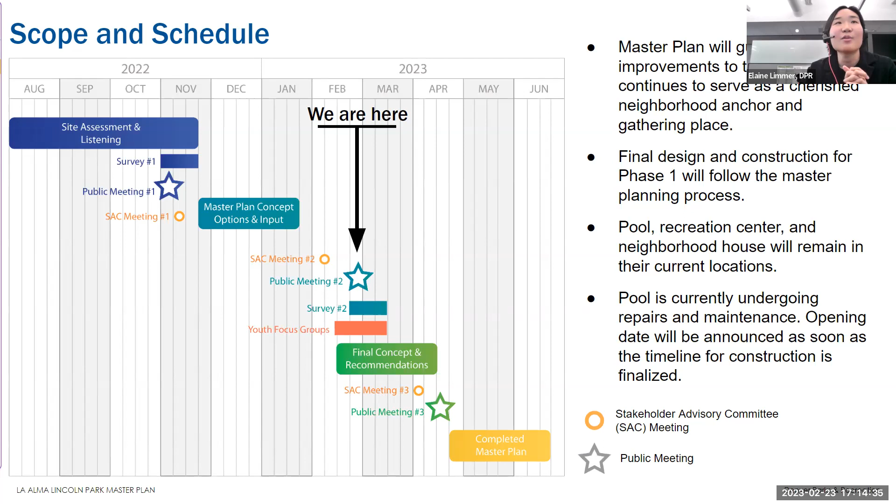Hello, everyone. It's great to be here tonight and have so many people virtually and in person. As Elaine mentioned, we're going to walk through some background for those of you who weren't able to attend the first open house. We'll go through a little background, then get into the concepts.

One thing we haven't mentioned is we are going to be doing some Zoom polling tonight. For those who are virtual, we're going to do some polls that'll pop up, trying to get feedback on the various concepts. For those of you at the rec center, we have people there to gather that feedback, plus a survey with similar questions. So we're capturing feedback in person at the rec center, but we'll do Zoom polling for those that are virtual.

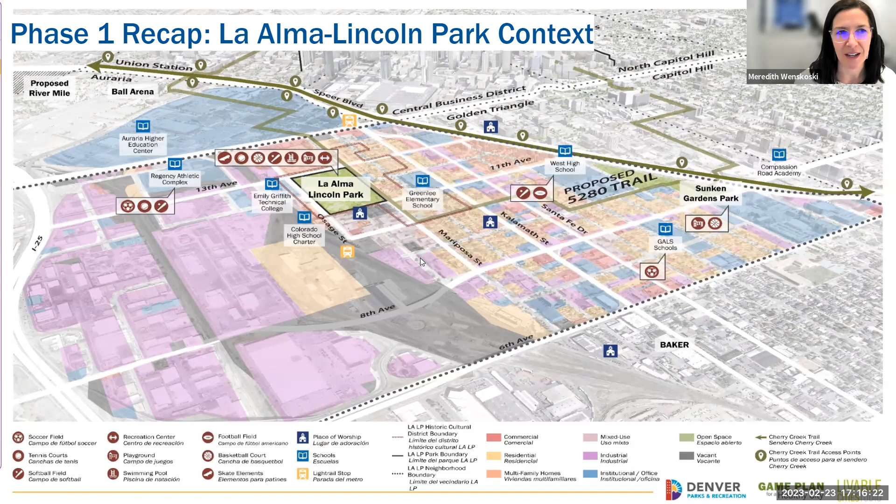As part of our initial work doing background and analysis, we did a lot of research to understand the historic context of the neighborhood. We've also had a stakeholder advisory committee that's provided some more detailed input on this, which has been really helpful.

If you want to go to the next slide, just to highlight a few of these elements - as we're moving through our concepts, we're really thinking about the history of the park and the neighborhood and how it's influencing and contributing to what we're doing today.

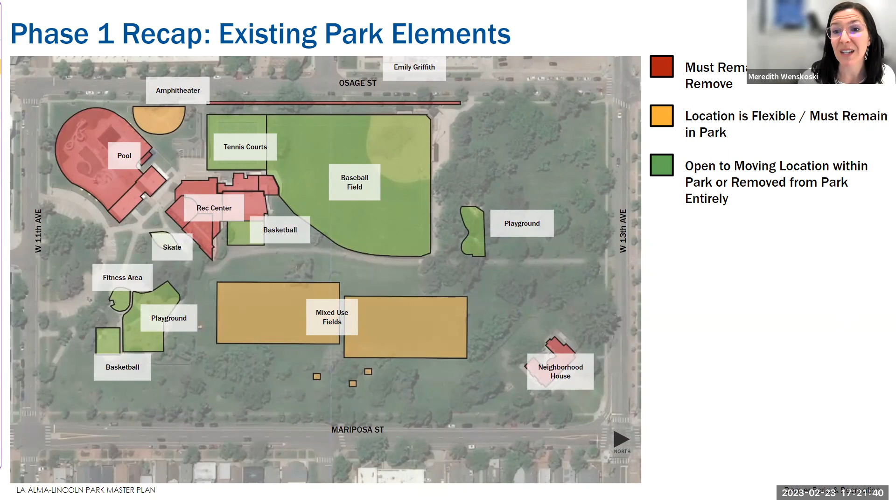Mixed use fields are also highly utilized and will be remaining. Then those green elements, other program elements like the tennis courts, baseball, playground, basketball, and fitness areas, are a bit more open, meaning we've explored different locations within the concepts, and some of the concepts have actually taken some of those programmatic elements out.

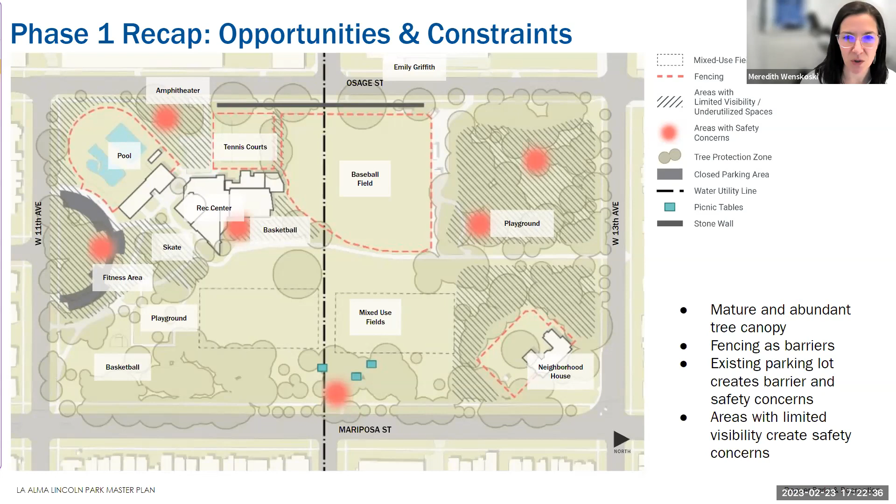So with that, Chelsea's going to go through the engagement from the last public meeting and the survey.

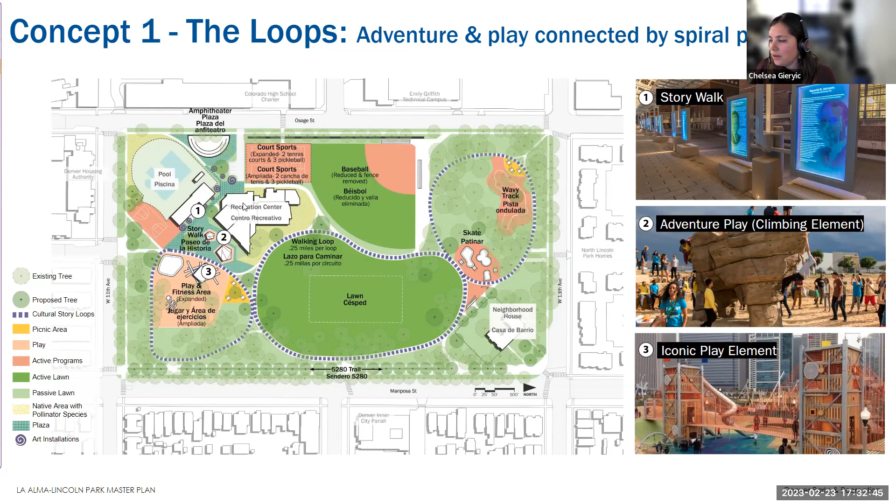The main loop in the park, the darkest purple line in the center here, this could operate as a walking loop, with each lap being about 0.25 miles. That's about the size of one loop around a standard track. It's a kind of fitness element.

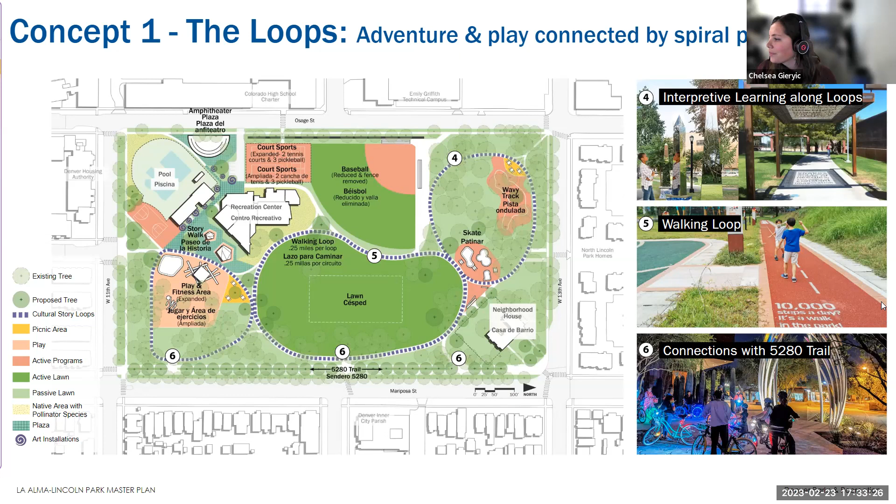And lastly, more active adventure elements will anchor the northwest area of the park, with very limited impacts to the beautiful tree canopy there in this corner of the park.

And then more fitness challenge stations will provide more fun ways for people of all ages to be active within the park.

We lastly wanted to highlight how this concept approaches a sense of arrival and circulation. Instead of the main path being a straight north to south linear experience, we've broken the park up into these loops. The main arrival moment remains along 11th and 13th, and an additional arrival is created along the 5280 trail off Mariposa here.

And parking is given less priority in this concept, but we are maintaining ADA spots here to give access to the back of the recreation center.

I'll let Meredith run through a couple polling questions.

Yeah, so we want to ask you all some questions. What we want to know is, what do you like most about this concept? I'm going to read through the options here to make sure we get the interpretation.

So the first is looping walking paths highlighting cultural stories through artwork and signage. The second is amphitheater staying in its current location. The third is story walk connecting entry plaza with amphitheater.

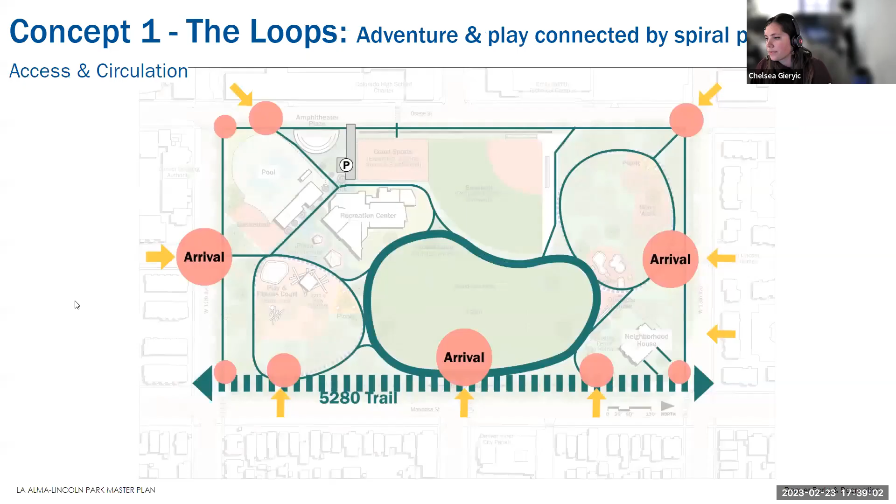So if there's anything else, feel free to put it in. And if you think about it later, you could even just say, I did not like this in concept one - I think the baseball field could go altogether. Well, you will see that in some other concepts.

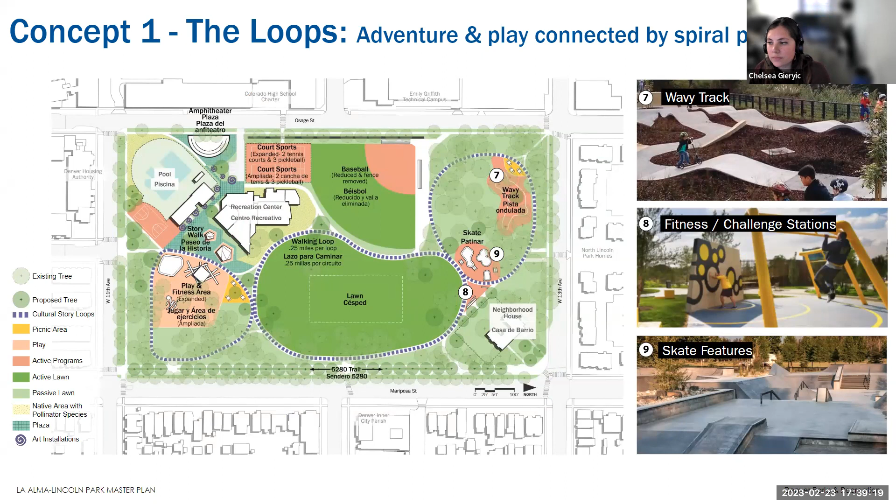So Chelsea, let's dive into concept 2. Sounds great, we will get going to the next concept, which we call the Ribbon.

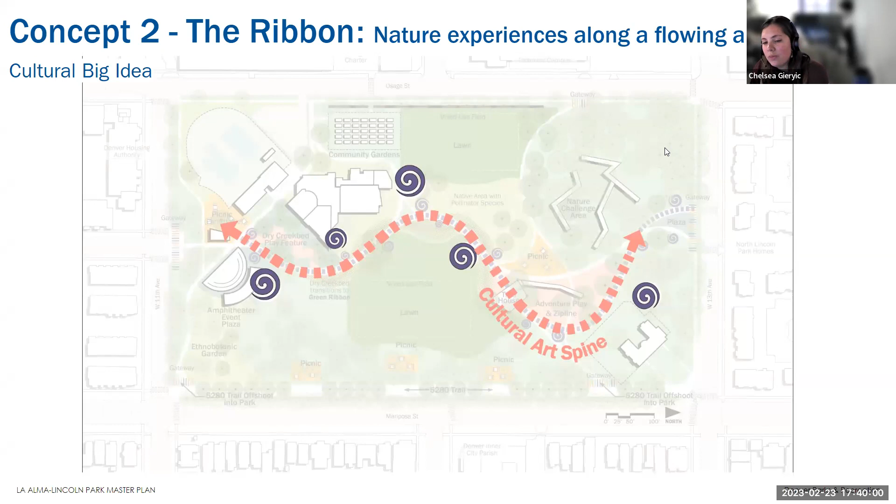The cultural big idea for this concept is that the major flowing art trail through the park would celebrate art installations that would be authentic to the neighborhood and the park's unique story.

Getting into this concept, you'll notice that some of the big elements have been moved or removed completely. The amphitheater relocates to the entry area along 11th here. We've been working closely with the historic preservation planners who've informed us that while it is a contributing historic feature and it would be a very costly, careful process, this might be a possibility. So you'll see some explorations of that.

And since this concept was all about natural experiences and inspiring a sense of resiliency, we did remove the baseball field in this option to make room for more swaths of native plantings and pollinator gardens. Community gardens replace the existing tennis courts in this concept.

An art walk into the park creates a vibrant, fun entry experience off 13th. And the plaza next to the recreation center would feature a dry creek bed, which creates nature play experiences for kids. And as I mentioned, the major cultural trail weaves in and out with this green ribbon as pictured in call-out number 3 on the right here.

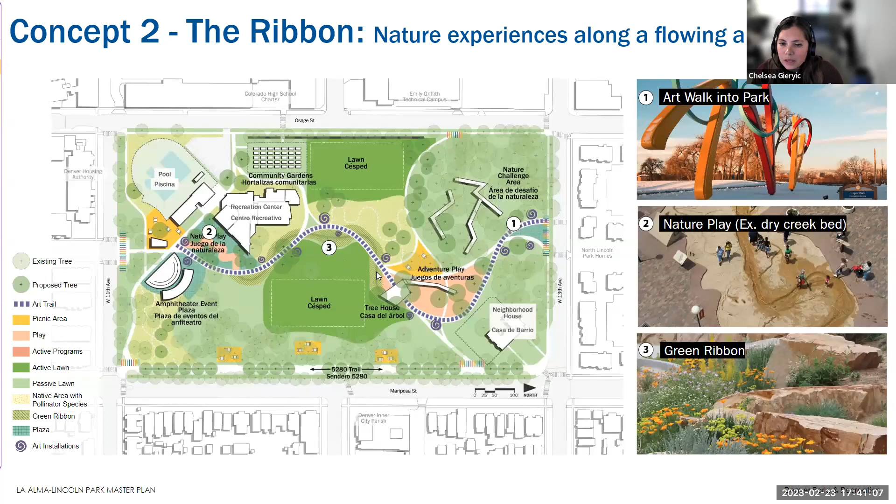So the art along the trail would be really vibrant and interactive.

You'll notice that the play elements in this concept have shifted to the north end of the park. This would be adventure play focused, featuring fun elements that we heard support for in our first phase of engagement, like a zip line.

And the play area would even have a treehouse element, pictured in call out number 4, which would allow both kids and adults to get up to a higher vantage point and enjoy some of the really beautiful views to the Front Range Mountains that the park provides today. And this adventure play programming could be a great adjacent use for the neighborhood house and their amazing existing youth programming.

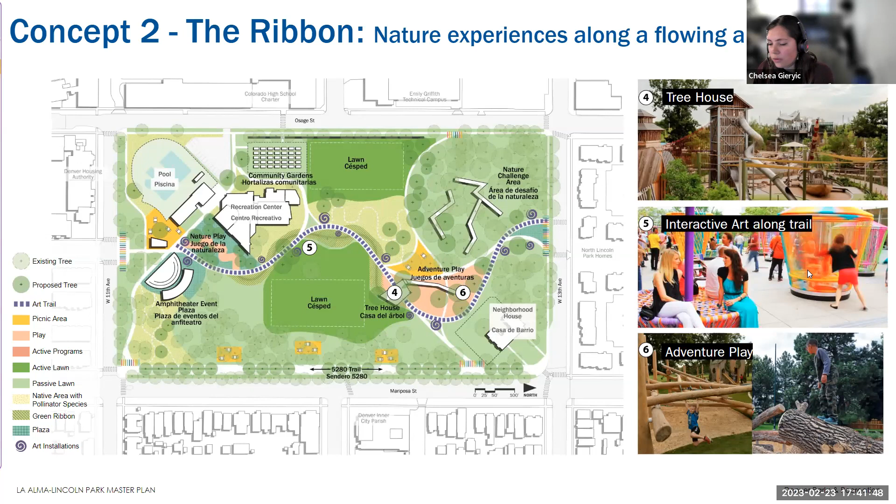This concept also works to maintain that tree canopy in this corner of the park and incorporates a nature challenge area, which could mean utilizing ropes or canopy walks to immerse people in those trees.

Artistic gateways would anchor the major points of entry for the park, creating an inviting and expressive entry experience. And at the corner of 11th and Mariposa, there's an ethnobotanic educational garden, which could be utilized as a learning opportunity to grow plants once grown by the local native people.

And lastly, we wanted to highlight again how this concept approaches arrival and circulation. We've created this flowing trail connecting the north and south areas of the park, and 5280 trail users will be encouraged to enter the park and walk, bike, or roll along that cultural art path as an offshoot to the main trail experience. And parking in this option is slightly expanded to support the community gardens and the recreation center.

Now, similarly, Meredith will run you through some questions here. Yeah, so let's see if the polling works this time.

Yes, so I will quickly share the results from the first one. Perfect, so people can see.

So it looks like the looping walking paths highlighting the cultural stories was the most popular, at 52%. Amphitheater staying in its current location, 39%. And then I'm seeing other comments coming through chat kind of supporting that. And then everything else is pretty darn similar. We got the story walk, baseball staying, expanded playground, and the north side of the park activated all between 26 to 32%. That's great. And I saw some others in chat, but that's great feedback.

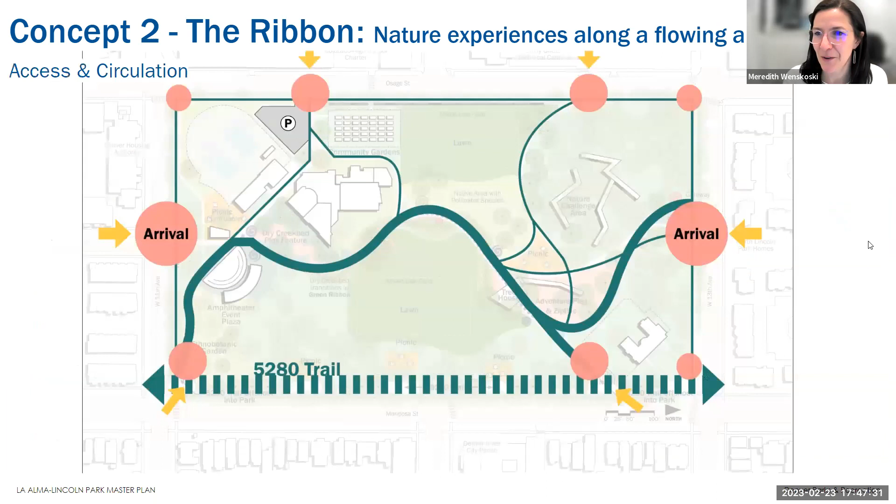So we will get into concept 3 here, which we call the Hub. This concept is all about providing spaces for people of all ages and backgrounds to gather, and really trying to provide something for everyone. The cultural big idea for this one is a central cultural core, which lands right in the middle of the park.

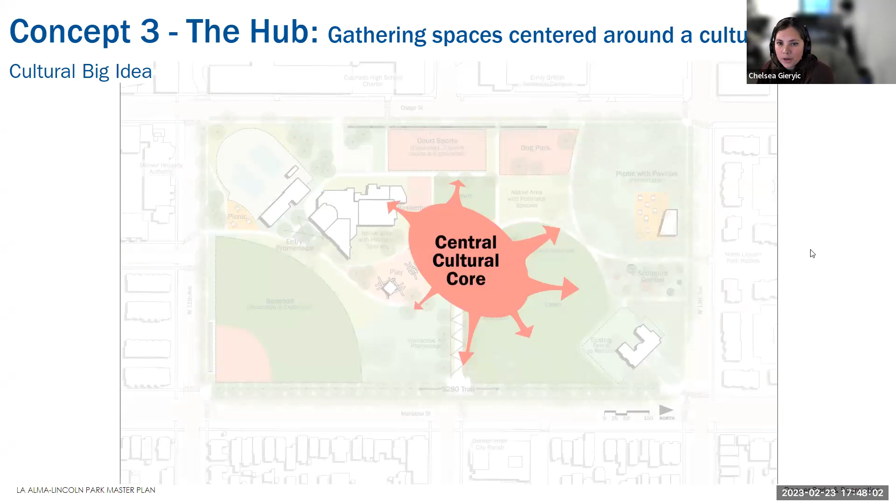Starting to get into the concept, you'll notice some of the big elements have again been relocated. The amphitheater moves to the central cultural core, and the baseball field moves to the corner of 11th and Mariposa, expanding slightly. This one would have a fence that remains around that. This opens up the central core of the park for more community uses.

The tennis courts remain here and include even more pickleball courts for this concept. The central core includes a larger event space supported by the amphitheater for concerts or markets. And there'd be this major promenade off the 5280 trail along Mariposa with interactive art elements.

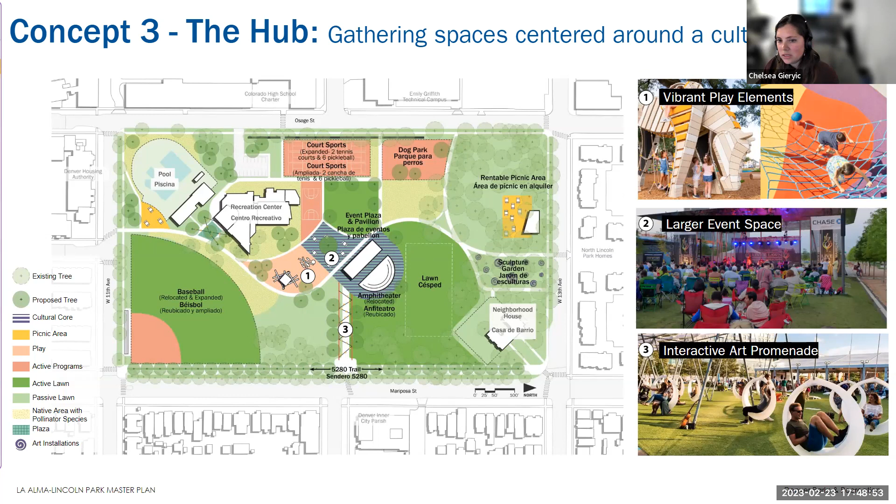The major play elements shift slightly to be right next to the event plaza and pavilion, and they would incorporate some vibrant play elements.

Another feature of this concept would be a small event space with some picnic tables to support the pool area. This concept does suggest a dog park, a smaller dog park, to activate the edge along Osage here. And then the entry to the rec center off Mariposa includes some trees with overhead lighting.

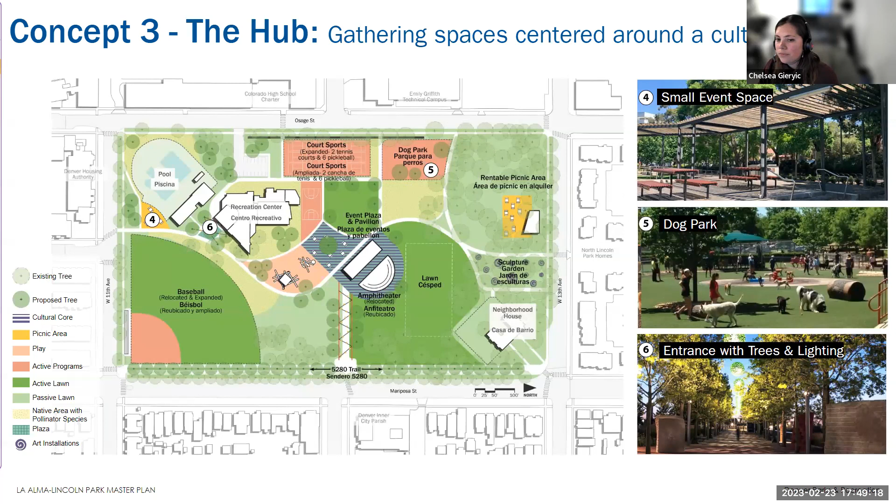A major feature of this concept is a rentable picnic area in this corner of the park, again working to preserve that tree canopy. But this would allow larger community events like festivals or even weddings to occur here.

An event lawn further supports larger events or concerts happening at the pavilion and amphitheater. And the entry off 13th would create a sculpture garden experience, really inviting passersby to come and explore the unique art and character of the park.

Lastly, we wanted to highlight how this concept approaches arrival and circulation. You'll see another flowing central connection from north to south. This concept really differs in that the major sense of arrival is created off the 5280 trail on Mariposa, maintaining those major arrivals on 11th and 13th.

And parking is provided near the rec center as well in this concept, to support those expanded courts and the dog park.

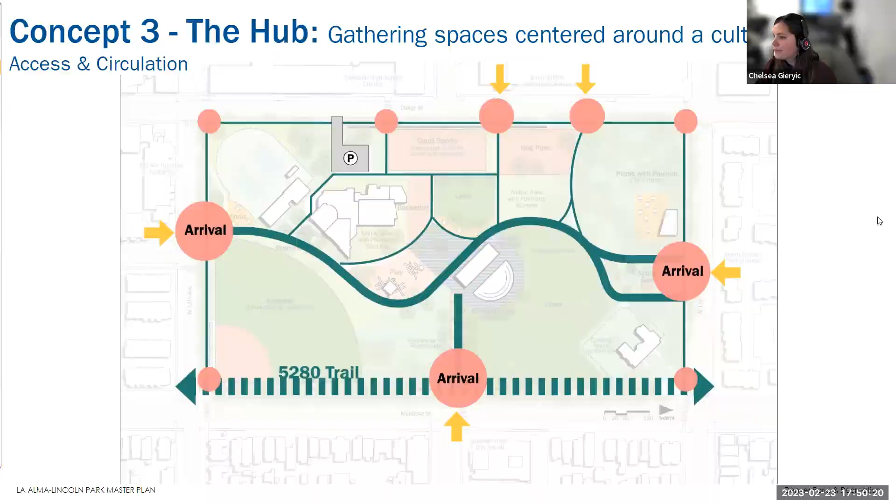So, another set of questions for you all. What do you like most about this third concept? Do you like the central cultural plaza with a new event pavilion and the amphitheater in that location? The second option: active programs like play and basketball near the central cultural plaza. So we're bringing that activity really central in this concept.

Do you like that baseball moves to the corner of 11th and Mariposa? I saw the comment about the softball field moving to 11th and Mariposa. The fourth being the relocated amphitheater to the center of the park.

The next is a promenade with interactive art, or an improved recreation center entrance with trees and overhead lighting - kind of almost more festival-like in front of the rec center. If there's other elements you really like about this, put it in chat.

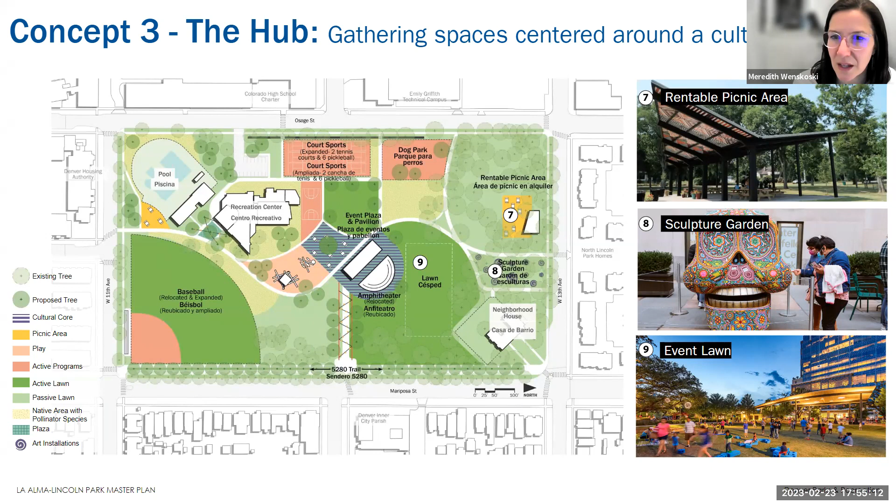Thank you, yeah, you like least that there's only one open lawn space, and it's important to have open lawn for people in their 20s and 30s. Okay. Thank you, thank you, this is such good feedback. Really appreciate all the comments you all are adding.

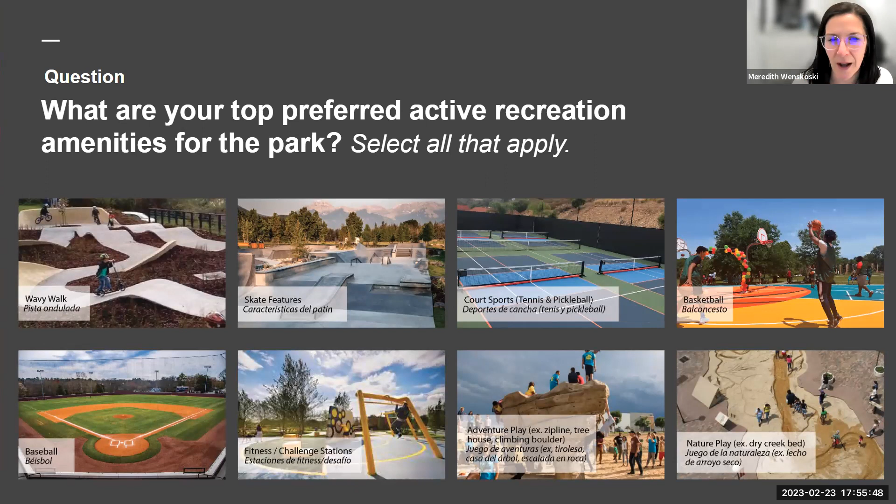Let's go to the next. So what we want to ask is really separate from these concepts. We want to just hear from you all what your top preferred active recreation amenities are for the park. A number of options we have here, and if you don't see it on the list, put it in chat. So outside of the concepts that you saw, select those that are really your top preferences. You can see the images here: wavy walk, skate features, court sports.

So this is tennis and pickleball, basketball, baseball, fitness and challenge stations, adventure play. That could be things like zip lining and climbing boulders, potentially a treehouse associated with that, or nature play, elements that's really about nature and exploration, but intended to be play.

Other, dump it in chat. So lawn space. Thank you, yes, that is a great active amenity that we will certainly have.

We'll give you all a few more, 10 more seconds or so, and then we'll close this and see what the responses are.

I'm seeing from the participants that the rec center central field is used for kids sports and feels that it's missing. So I assume that's on concept 3, that felt like it was missing. Okay, so really making sure that we have those multi-use fields and enough space.

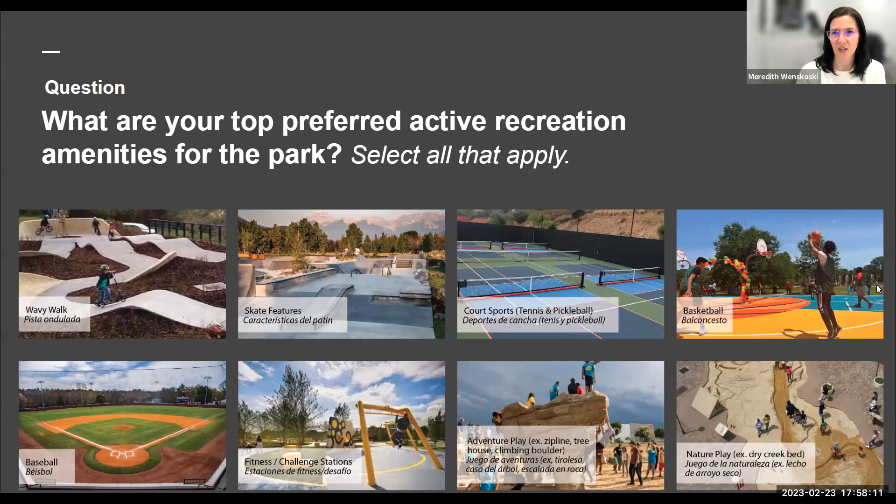All right, let's go to the next question, because we want to also hear from you all what your top preferred leisure amenities are for the park, in contrast to the really active recreation component. So options here: dog park, passive picnic areas, so places to gather and picnic, or rentable picnic areas. The difference there is passive, meaning like first come first serve, anyone can just go there. Rentable, meaning you can obviously get a permit and actually have an event there and rent the space out. Pollinator gardens, ethnobotanic or educational garden, community garden, small event space, large event space, sculpture garden, or other.

So I see the comments about the open lawn area. One thing I shared at the very beginning is that having that open lawn and multi-use field space will certainly be in the park. It is definitely a key component that will remain. It will likely be reconfigured to some degree, but I'm hearing through the chat the importance of that flexibility of space for families, youth, and everybody.

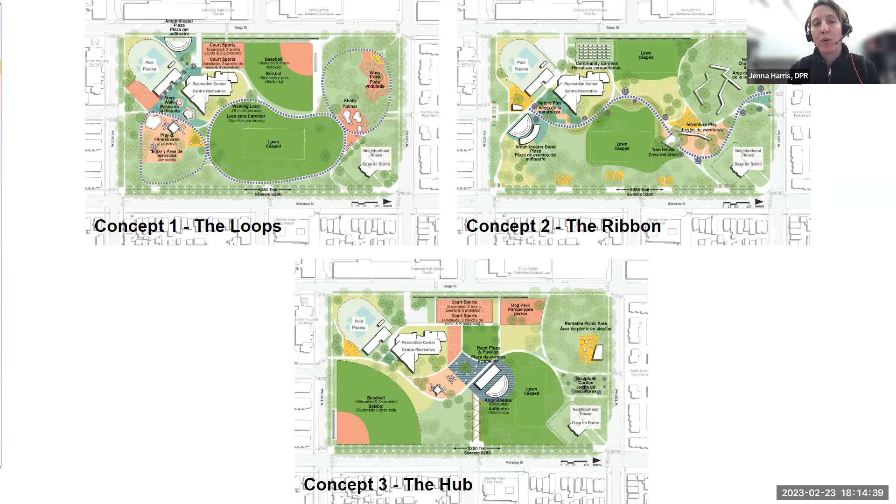Maintenance is something that we are always considering as we're working on planning and design projects. We work really closely with the downtown operations team to make sure that everything we're putting in our concepts is maintainable. As it relates to art specifically, likely there would be a 1% for public art coming out of this project from the construction budget. So we would be working with Arts and Venues, the city department, to lead a community-based process for art selection. They would also be taking the art into their collection and maintenance program. So while there's not specifically dedicated funding for this particular design project, we would be fully integrating future improvements into our whole downtown maintenance program, if that makes sense.

So it's a very valid question and something we are going to continue to discuss both internally and with stakeholders, and we really appreciate the question.

Any other questions you want to ask currently, and we'll always — oh, looks like we have one from Randy. It's Randy again, just one more question: which will come first, the park or the 5280 loop?

That's a great question, Randy. It's kind of the chicken or the egg question, but not really exactly. I will say that we are working really closely with the Downtown Denver Partnership to make sure that we're respecting the 5280 trail. We're supporting the future installation of the 5280 trail. However, we won't be taking any funding out of this project to construct and design a portion of the 5280 trail. So very, very likely this project will be built first, and then additional improvements will be coming later from the 5280 trail.

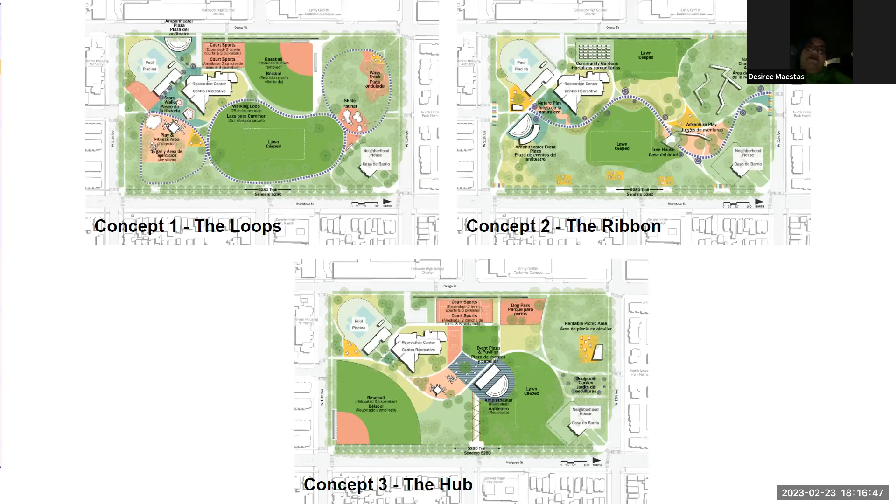That's a good point of feedback. Introducing additional standalone restrooms apart from the ones at the rec center isn't something we're considering in these concepts, but we'll take that into account as we refine the next stage.

Just to make sure I'm understanding you correctly, the desire would be to have additional publicly accessible restrooms in the park as a separate structure? Well, yeah, it's kind of a drag when we're out at the park and we have to run home to go pee, and I hate using those porta potties.

We were just chatting about that with the rec center here. If the rec center is open, people can come use the rec center bathrooms. The supervisor is nodding. Great, so the rec center bathrooms are open for use.

The rec center is not always open. And it's not true that the rec center is always open for bathroom use - sometimes they say you can't use the bathroom here. We'll make sure staff knows. Thank you for that input.

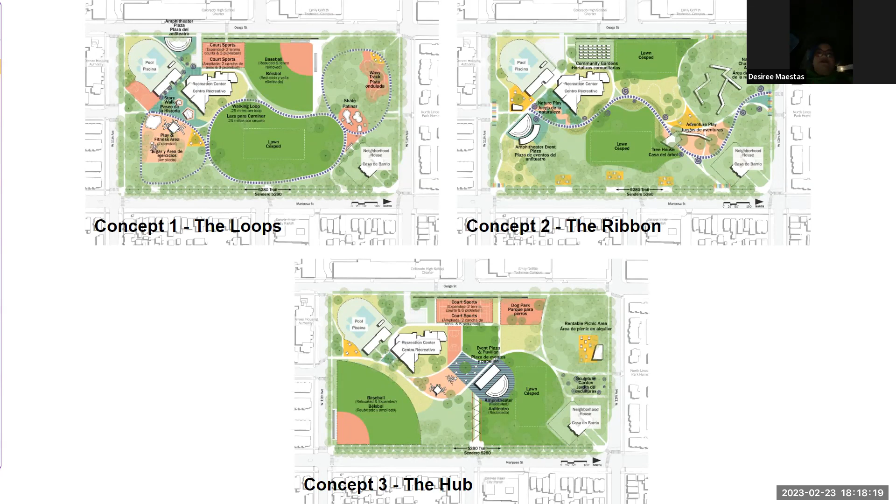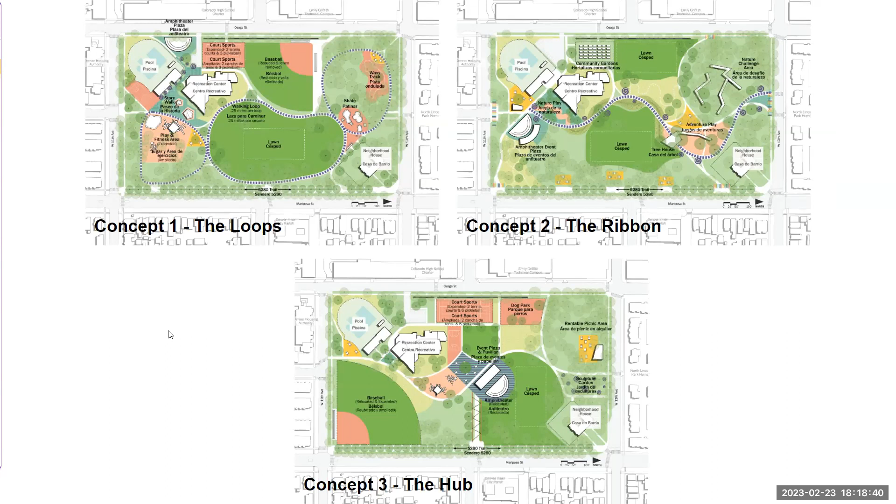Anna, did you have a question? Just one of the things you guys mentioned earlier at the summer meeting was that there would maybe be a fourth plan. So is it going to be that you take all the feedback from the last meeting and this meeting and come up with a final plan that's already decided, or will there be another round of feedback? I'm just curious about the process, sorry if I missed that earlier.

No worries, I'm glad you asked. We'll take all the input from this meeting and the last phase, plus additional feedback as we take these concepts around the community, and develop what we'll refer to as a preferred plan. That's what we'll present as a draft at the next public meeting, and then take that input and document it as the final master plan. Perfect, thank you so much.

Any additional questions people want to ask in this meeting? We're always available for questions after this meeting as well.